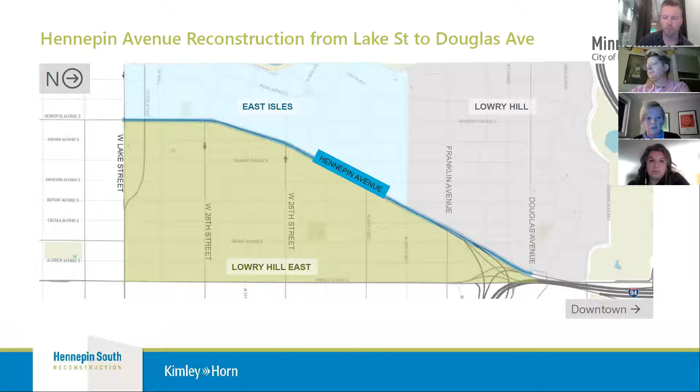The policy plan. So, when we first kicked off this project a couple of years ago, specifically in 2020, and maybe I should take a step back and just remind the group too that we first initiated engagement on this project beginning in 2018. And that was because we were looking to submit an application for federal funding to help offset some of the local reconstruction costs for this project. It was a successful application. We were awarded about $7.5 million for this project in federal funds.

And so we started the project back in 2018, and we did start with some of these policy documents that you see here. Since, in the last few years, the City Council has adopted several new policies, and these are really the 7 that are the foundation for our work. So the foundation for our recommendations, the basis for our recommendations. So in addition to all of these different policy plans, which are the foundation, of course, we have technical analysis, and we do a lot of analysis of the different aspects of the corridor, traffic modeling, et cetera. And then we also look at public feedback and how do we incorporate that, knowing that our foundation is the policy plans.

So many of the key feedback themes that we heard throughout the engagement process specifically were unfortunately competing. So as I alluded to, we had sort of the full spectrum of comments, but we had comments on either end of the spectrum, and that was sort of the majority. And there were just so many competing comments that we received through all of the rounds of engagement. It just can't be addressed in one layout.

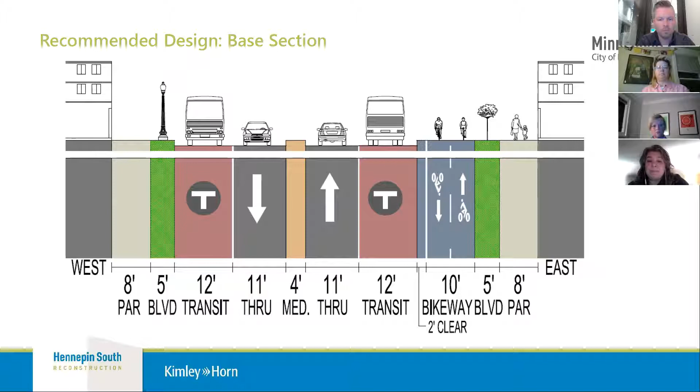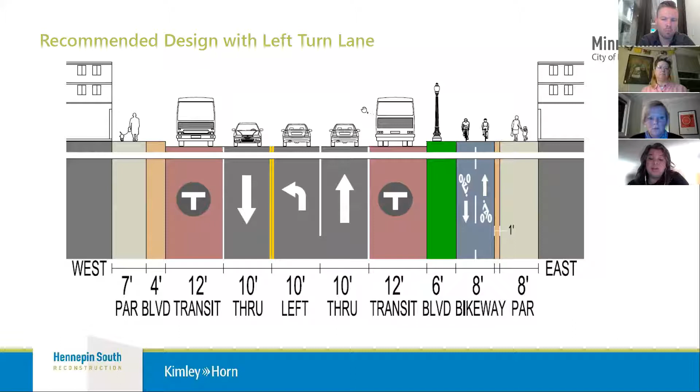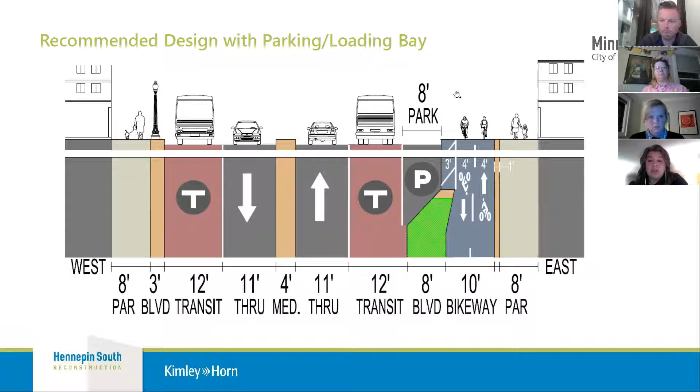Then this section shows what it looks like where parking is fit in the corridor. This is one of the most constrained situations that we have along the corridor where we are able to fit in parking. So you can see an example of what that looks like.

Great, and I'll dive into a little bit of the details, first starting with pedestrian design. Just a quick recap, and I know you're all familiar with Hennepin Avenue in terms of existing conditions and context, but this is an important element, as Jonette has mentioned a couple of times: it is on the city's high injury network. So safety, again, was paramount when we were looking at how to redesign this corridor. And both pedestrians and bicycles are overrepresented in injury crashes.

Also, as Jonette mentioned, we have inconsistent sidewalks in terms of width, and they're very narrow in some blocks, especially in the northern portion of the corridor. And according to our Transportation Action Plan, which was adopted by the City Council in late 2020, it is on the pedestrian priority network.

So in terms of an overall recommended design, one of the key features that we were trying to address was the actual physical crossing distance on Hennepin Avenue. It is 60 feet curb to curb right now, with essentially 30 feet on either side of the center line. We were able to reduce that between 6 and 10 feet, depending upon where you are on the corridor. So the cross section is 50 to 54 feet, again, depending upon where you are exactly located.

Another thing that we really wanted to improve was some of the very long blocks along the corridor. We included enhanced pedestrian crossings that will include signals. They will be signalized specifically at Fremont Avenue and 25th and a Half Street. Curb extensions are included on cross streets. This is more difficult to accomplish on Hennepin Avenue, and we can't include them there because we do have curbside running transit lanes. But on the side streets, we are able to accomplish those in many of the locations where it is feasible.

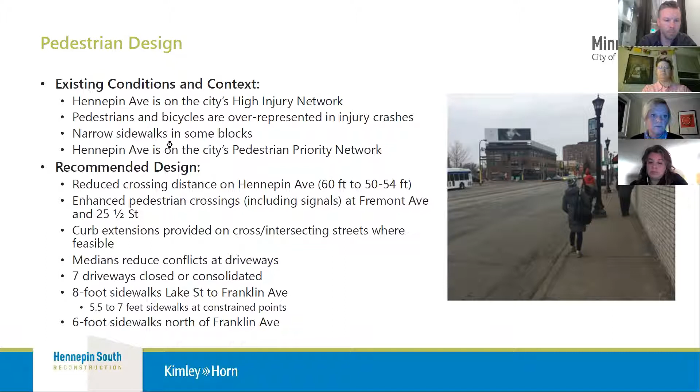In terms of bicycle design, currently, as you're aware, there's no existing bicycle facility on Hennepin Avenue. As mentioned, it is on the city's high injury network, where bicycles and peds are overrepresented in injury crashes. With that newly adopted policy guidance in late 2020, this specific segment of Hennepin Avenue is on the All Ages and Abilities Bicycle Network, the AAA network. And at volumes like this, they do need to be protected facilities.

In terms of the recommended design, as Jonette mentioned, it's a sidewalk level two-way protected facility on the east side of Hennepin Avenue. It is typically 10 feet wide, but it does have that small 8-foot reduction where it is located at constrained locations. The design that we're looking to accommodate in the corridor does account for the existing and future protected bikeways on the intersecting streets. So just as an example, 26th, 28th, where we've been able to accommodate that.

I do think it's really important just to remind you as well that, I know there's been some gaps in terms of timing with last rounds of engagement, but we did evaluate and present different options for other streets as well as hybrid options for the corridor, but they just didn't meet our policy guidance. There were also other trade-offs by moving the facility off Hennepin onto another facility. There were major impacts to parking in order to get that facility up to a AAA facility.

We also did evaluate one-way bikeways, so having bikeways that were separated on each side of the street. And as you can imagine, we had a major challenge here: every foot, frankly, counted in every block segment as we looked to make adjustments to accommodate landscaping and all of the other items that we were looking to fit into this constrained amount of right of way. So we did evaluate the one-way bikeways; they just did not fit.

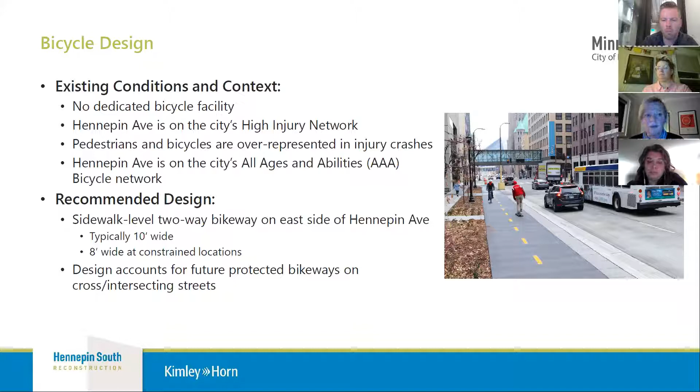In terms of transit design, you're probably all familiar with the fact that we did pilot bus lanes on this corridor in 2018. We implemented dynamic lanes that are bi-directional in 2019, and we've been able to extract a lot of data because Metro Transit tracks that via an AVL system on all of their buses. What we did find is that they have had a significant impact on transit travel times and performance, with an overall reduction of 15 to 18% in transit travel times, and also improving reliability from 50 to 75%. So we've seen good results with the facilities that we currently have on the corridor.

We do anticipate that with the implementation of the E-Line BRT, which is a Met Council initiative, we will see ridership growing from 25 to 35%. That's consistent with growth they've seen on existing lines, both the A-Line and the C-Line. And we do know, based on the analysis we have done relative to traffic, operations, destinations and origins, that the transit riders utilizing those facilities do have a destination on or near the corridor. It is also on the city's transit priority network as identified in the Transportation Action Plan.

Of course, the recommended design, again just recapping what Jonette mentioned, is full-time 24/7 transit lanes, curbside from Douglas Avenue to the Uptown Transit Station. There will be 3 BRT stops utilizing the Uptown Transit Station, and then 2 new stops specifically at Franklin and 25th. That does result in an overall reduction in the amount of local stops, which is typical for how Metro Transit develops and implements their BRT facilities.

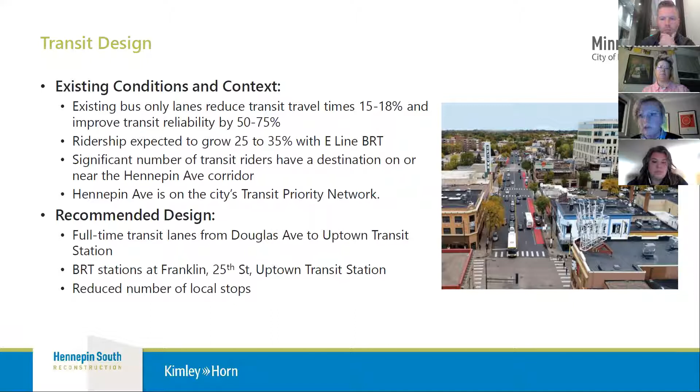So just touching again on the vehicle design, starting with the existing conditions and context and how that informed the design. Hennepin Avenue today has 2 through lanes in each direction. Those 2 lanes in each direction don't operate very well. There's a lot of lane changing, which we see reflected in the safety and the crashes along the corridor. Often people are changing lanes out of the right turn or right through lane to go around a bus.

And then there's left turners mid-block, and so people are changing lanes out of that left turn lane. So really congested and disrupted flow. In addition, most intersections or signals have restricted left turns during the peak periods, and a high number of the pedestrian and bicycle crashes involve left turn vehicles. So that was another thing that we were thinking about. As we talked about, Hennepin Avenue is on the city's high injury network, and it also is on the city's freight network.

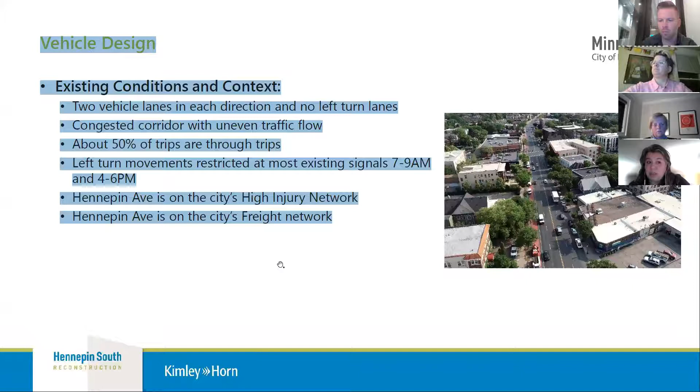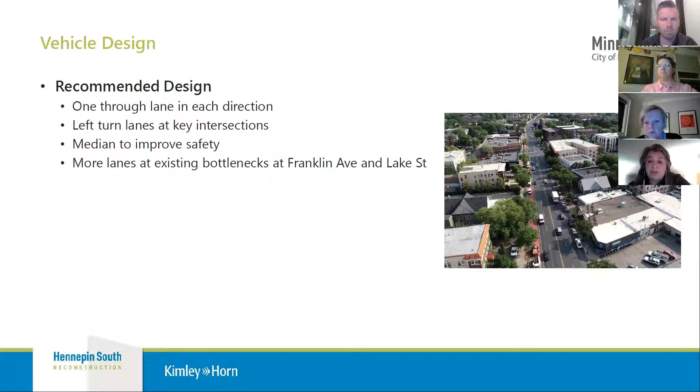So the recommended design is really separating out those different uses. So transit is in its own lane. Left turns where they're allowed are in their own lane with one through lane. And the median is really intended then to improve safety so that those mid-block left turns aren't occurring. Where there are left turn lanes, left turns are allowed all day, so they won't be restricted like they are today. And then, as I mentioned earlier, there are additional traffic lanes near Franklin and between Lagoon and Lake Street based on the traffic needs in those areas of the corridor.

This graphic shows the locations of the proposed left turn lanes. So 22nd Street, 24th Street, 26th Street, 28th Street, and then Lagoon and Lake Street on the south end.

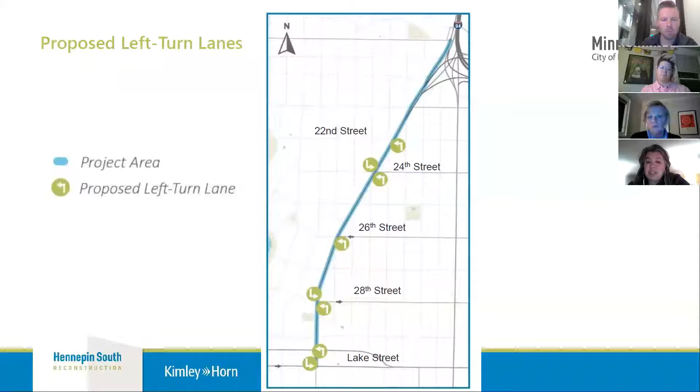In terms of parking and loading, we have received a lot of comments about parking and loading. There are 311 existing on-street spaces on Hennepin Avenue. But we also looked at the overall parking resources in the corridor, and there are more than 3,600 parking spaces on Hennepin Avenue, on cross streets, in parking lots, and in parking ramps within one block of the corridor. So as we looked at the layout, as Becca mentioned, it is a constrained corridor, and there are 20 parking and loading spaces that we were able to fit into the corridor.

And we certainly recognize that is not enough spaces to meet some of the needs and demands of businesses and residents along the corridor. And so the recommended design includes district parking solutions, and that's represented in the yellow shading on this graphic. These are some of the blocks that we identified as focus areas for district parking solutions to better manage the overall on-street parking resource.

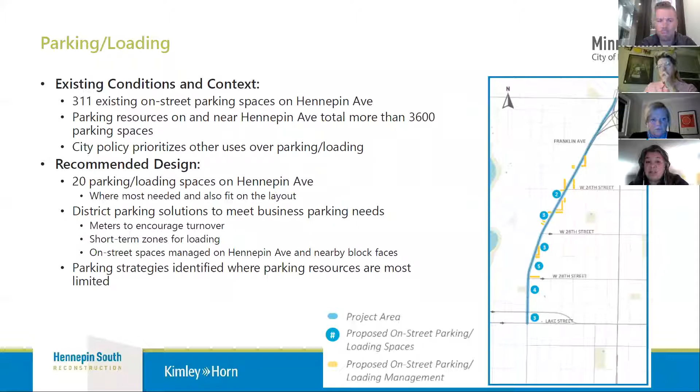And so what happens in those district parking areas could include meters. It could include short-term zones for loading, pickup, drop-off types of activities. And of course, it does include Hennepin as well as nearby block faces. And those were identified and targeted where the overall parking resources in those blocks were more limited. So maybe there weren't off-street parking lots, or the parking lots were very limited. And these two graphics just again speak to how we looked at the overall parking resources and focusing the district parking strategies in the areas where the parking resources were the most limited.

So touching on schedule, we are here in January of 2022. We're in the third round of engagement that's occurred since early 2020, and are sharing Public Works' recommended layout. We do anticipate that Public Works will bring that layout to the City Council in Q1, so February, March timeframe. The layout would need to go through City Council approval. Then there's still the final engineering phase, which would occur throughout 2022 and into 2023, with construction anticipated to start in 2024.

So all of the project materials are posted on the project website, which is linked on this slide, minneapolismn.gov/projects/Hennepin South. The full layout for the corridor is there, as well as a summary of the layout and some frequently asked questions. There's a longer version of this presentation and a link to the comment form. The city is hosting a public open house tomorrow at 4:30 p.m., which will be a virtual meeting, and are asking for comments to be submitted through January 28th.

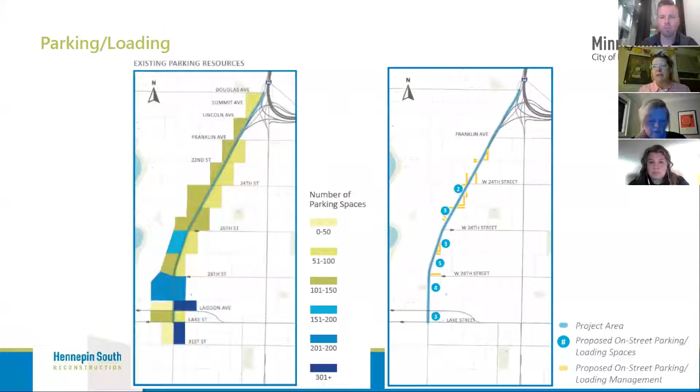So with that, we can open it up to questions. Just real quick, one of the first questions that came through was about one of your graphics, Becca, so I might just ask you that one first. I'm sorry, I'm not going to remember the slide number. It was the last slide that you had presented with the checkbox for successes. That one. The question was, what do the yellow checks indicate?

Yellow checks mean that we weren't able to address them as fully as we would have liked. So if you look at the left-hand column in terms of issues with the existing roadway, if it's a green check, we feel that we have adequately addressed it with a proposed layout. Level of service for traffic, green space, which was one of the competing interests, right? With all of the other modal elements that we were looking to include within that space.

We wish we could have had more space, been able to preserve more trees. And then parking, which currently isn't an issue, obviously is something that we're looking to address with district parking. So yellow means that we just didn't get to where we had hoped to get with it, but basically showing all of the areas in which we feel confident that this layout solves and addresses. Thank you.

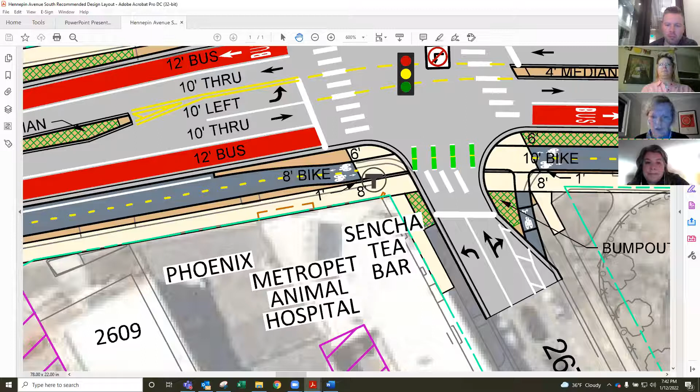And as I mentioned earlier, we're at about a 30% design level. And so there's much more design work to come, but where you can see the termination of the medians, specifically on this to the left of your screen, if it's mirrored, it'd be to your right. But in that specific location, we'd be looking at doing something similar to what was integrated potentially on Grand Avenue, where we do have some of those hardened center lines as well to sort of extend up to the intersection.

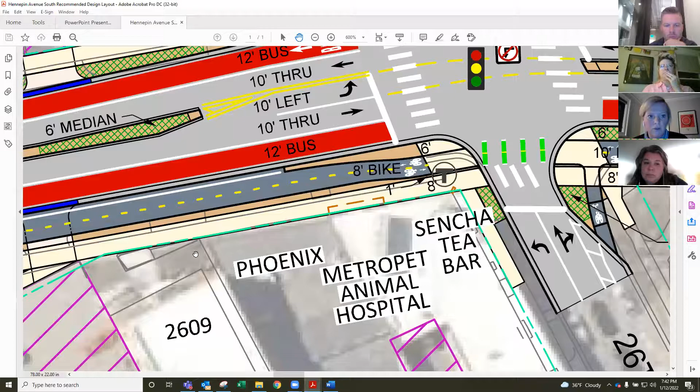So that will also help with people and prevent people from trying to cut the corner to take that at high speed. So that's something that we'll work through as we move forward with final design should this layout be approved. But just wanted to add that element in as well, just for an explanation. And this would be an example of where the sidewalk and the bikeway would be raised at an unsignalized intersection.

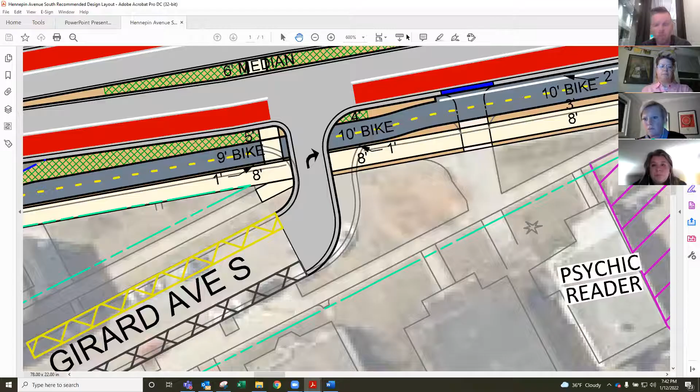Okay, we've had a couple of questions come in about the decision to sort of stop the project at Lake Street. There's been a couple questions about continuing the transit lanes all the way down to Lake, like past Lagoon, because of congestion issues, and also the bike lanes. Can you talk a little bit about the decision to sort of stop those modes of transit at Lagoon? Or where you decided to stop it? I'm paraphrasing a couple of questions here, so.

Well, Alan, did you want to take the question specifically about the transit lanes, or Jonette relative to the Uptown Transit Station? Yeah, maybe I'll start and then Jonette, certainly jump in here. So a lot of effort, a lot of work went into this, and I'll kind of distill it down to a few comments here. We worked very closely with Metro Transit on their bus operations. I think Becca referred to that in her earlier comments. And so we have a very good handle on where the bus can benefit from an exclusive lane, where it kind of needs the help.

And so part one is that we factored in what the bus travel times and experiences are. And then part two is we wanted to have a holistic design for the whole corridor. And when we get down to the south, kind of that last block there, Lake to Lagoon, the counts are not as high as they are at Franklin. At Franklin, we have very high counts, and we needed to kind of expand our roadway a little bit. At Lake, we have a little bit of an unusual situation going between Lake and Lagoon. Although the counts are not terrifically high, we have a very high number of turns on and off the corridor.

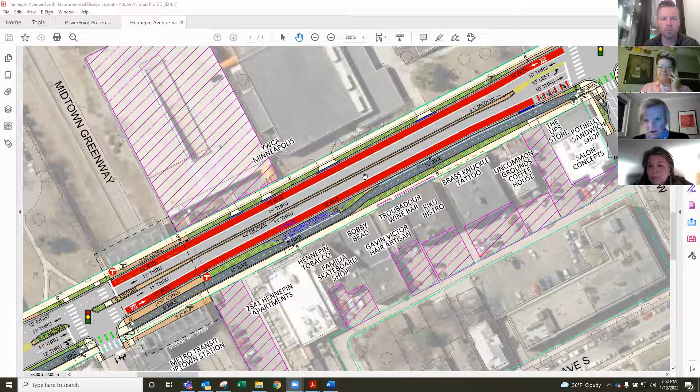And so quick follow. The medians that are planned, will they be planted, or is the intent that the medians will be planted? It's a great question, Kevin. Also another dream of ours, in spaces where we have adequate width, is to do plantings in the median.

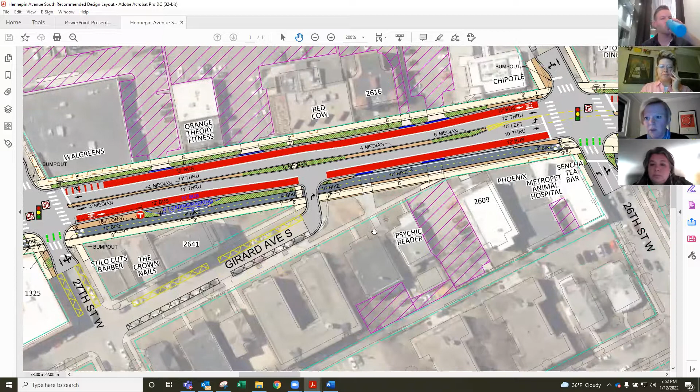What is always the challenge, and I think you probably know this if you've participated in any other reconstruction project that the city has done as part of engagement, is that one of the biggest challenges that we have is with maintenance on these and having a committed plan for maintenance. Sometimes, as you know, that will defer to special service districts, and there are two in this specific location. And other times that's something that is accomplished by having city crews do maintenance.

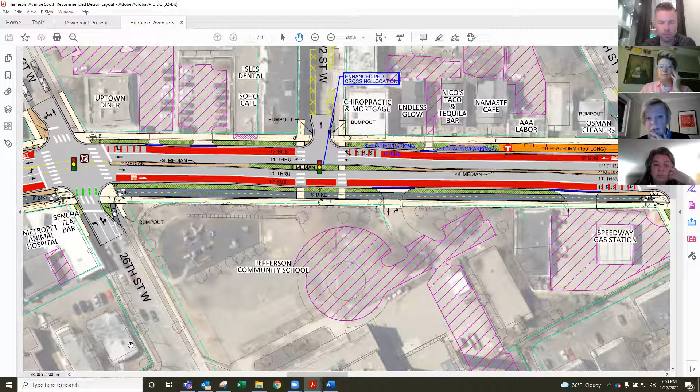But from our perspective, there are areas, specifically the one that Jeanette kind of panned to here, where we have 8 feet. These are areas where we could accommodate trees and other types of plantings. There are some locations, however, that get down to 1 to 2 feet. Those are going to be more challenging. And so I definitely don't want to overcommit. It is definitely something that we are interested in doing.

And similar to the other conversations that we've been having tonight about the design elements, we're hopeful that we can get to the point where we can do some plantings. Again, just overall concerns with how do we maintain them, who maintains them, and those sorts of responsibilities are always just sort of a hang up when we start looking at these. And with that said, yes, I'm well aware that there are great landscape medians all over the place, and I wish we had more width throughout the corridor to be able to accomplish that.

But one thing that we did try to do in this circumstance was really push that greening towards the edge as well. And where it is feasible, we do have those wider elements, especially at those pedestrian crossing areas where we can accommodate trees. So I know that was a mixed answer. We're hopeful, but at this point, it's hard to say with full commitment that we're going to be able to specifically green those, unfortunately. And I don't want them to be concrete or some sort of impervious surface either. So it is certainly something that we will continue to work on and push for.

And I just brought up this block just as an example. So you'll see the median actually gets skinny here. It goes to 2 feet. And we did that where possible so that we could have green on the outside. So what we didn't want was a median that's 3 or 4 feet, which isn't really wide enough for planting, because that's got to account for the curbs, and then also a space on the outside that isn't wide enough for trees. So in some spaces, like Becca said, we did push that space to the outside so that we could have one good green space instead of two very narrow ones that are not really good for green space.

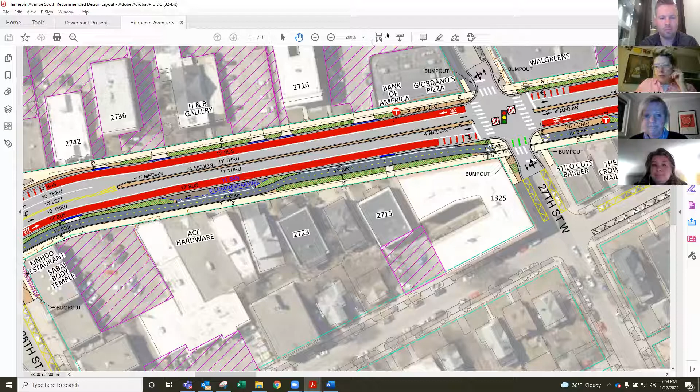Well, we here in the Wedge, we're kind of punk rock. So maybe that sounds like an opportunity for innovation. Maybe there's a partnership with the U there to really explore what tiny urban medians with low maintenance that can handle salt look like, right?